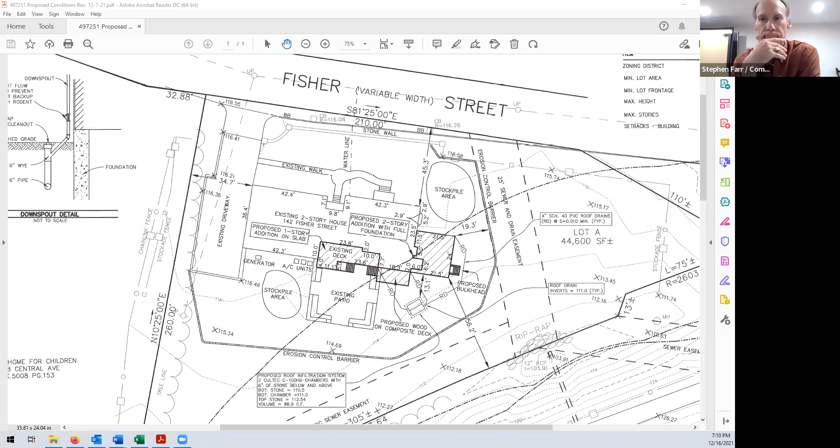Any commissioners have any comments? Bill, any comments? No comments. Peter? I'm good. Stephen? No comments. Allison? No comment. No comment from Clay either. No comment from me either, Janet. Sue, any comments? No comment.

Comments from anybody in the audience? There are no raised hands. Okay, so I think that we now have a DP file number, and you've added the subsurface infiltration to capture some additional roof runoff. So I think we have everything we need.

So can I have a motion to close the hearing for 142 Fisher Street, DP file number 234882? So moved. Second. All in favor: Bill, Aye. Allison, Aye. Stephen, Aye. Peter, Aye. Artie, Aye. Sue, Aye. Great.

Thank you very much. I think we have an order of conditions exhibit to look through, and we will issue that later this evening.

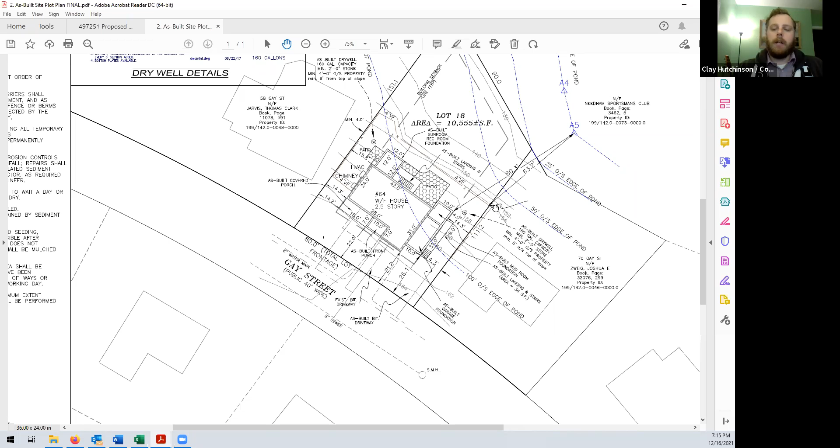However, one of the deviations was this patio was slightly larger than what was proposed. The original application had it coming squared off like this, and it was extended out a couple feet, all within existing lawn. They also installed the 2 dry well units that were proposed, one outside the buffer zone and one within. As discussed at the meeting last year, they replaced the fence in the existing same place, same style chain link fence, just an updated fence.

Concerns? Or what is your recommendation? Staff recommendation is that it is substantially within compliance. It looked good. We would recommend issuance of a full COC. There were no plantings required, so there isn't any mitigation period, so it would be a full COC.

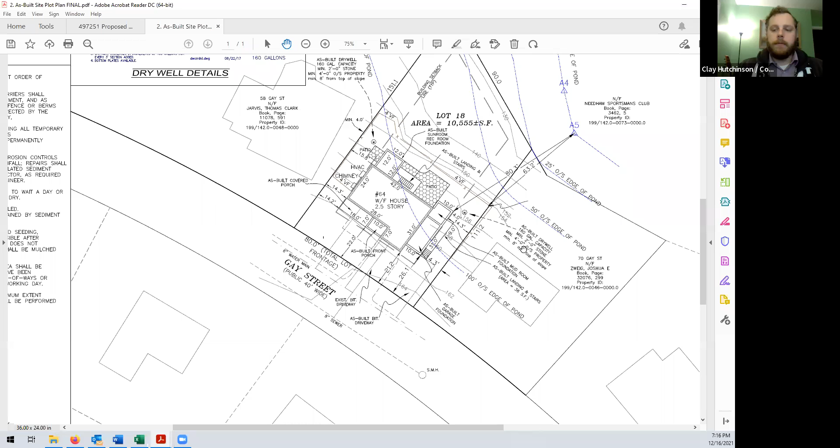Thanks. Pull that down now.

Okay. Any comments from the commission? Bill, no comments. Artie, no comments. Janet, you've disappeared. Stephen, no comment. Peter, no comment. Allison, no comment. Sue, no comment.

Does anybody in the audience have any comments on this project at 64 Gay Street? There is nobody in the audience.

So may I have a motion to issue the certificate of compliance for 64 Gay Street, DP file number 2348847. So moved. Second.

All in favor. Bill, aye. Aye. Aye. Allison, Sue, aye. Everybody said aye along the way, right? Yeah. Aye. Great. Aye. I'll say aye. Good, thank you very much.

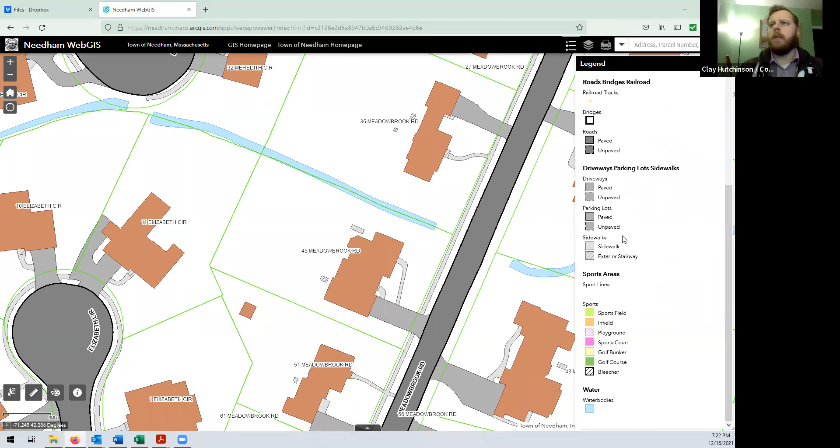Janet, I don't know if you still wanted to mention something about that before we close.

So this is 45 Meadowbrook here, and this is where Rosemary Brook runs. The pictures from the email are located here, here, and the ivy covered one is here. The other trees are right in here, along the same bank, similar. So essentially back to the back of the house next to the brook, those trees you want to take away are immediately alongside. So the front of the house is here, and all the trees in question are immediately alongside the house.

Oftentimes under administrative approval we require replanting 1-to-1 for hazard, 2-to-1, following the same tree removal guidelines. In this case, I think it would be difficult to replant 5 trees, one because there's still a canopy there, and two because of the proximity between the house and the brook. There's not a lot of room to dig down to put in a new tree, at least without removing those stumps, since this is a heavily vegetated corner, not lawn that they're trying to expand. So if they left the roots, it would be difficult.

We have in the past asked for replacements that contribute the same system, but not necessarily in the same location. Yeah, I don't think they should plant something close to that wall again, that doesn't sound like a productive place, unless they're shrubs. Good point.

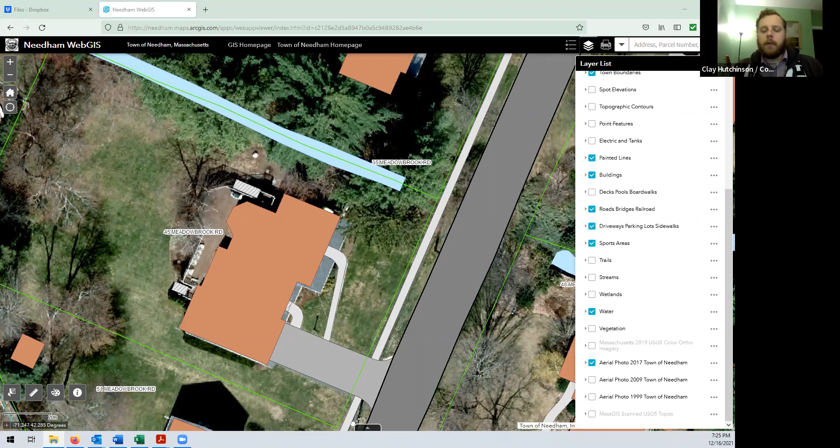Given the level of review we've had so far, I did meet the arborist out there over the summer originally to review these trees, and the house had not been acquired by his clients yet. It was sold, I believe, in September maybe. So now they're moving forward trying to address some of those trees, which was one of the concerns they had.

The discussion here is whether we should even be moving forward still under the admin approval, or whether they should be submitting like the RDA or an NOI, given that it's 5 trees. Oftentimes for these reviews, I think we're limited to 2 or 3, more of a minor project.

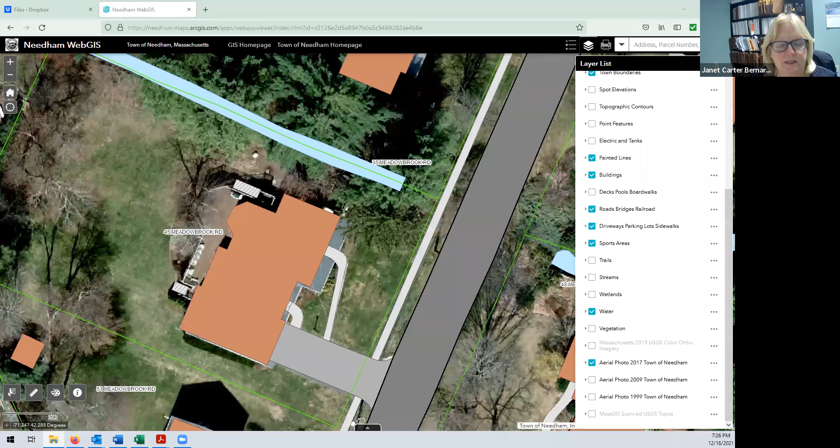Well, I guess if everybody's okay, you can take that down again. Personally, I see this as an administrative review because they're all right against the wall, but I'll hear from any commissioners that have a different opinion. Bill? No, I agree, administrative is fine. Artie?

Allison? I agree with the administrative approval, and it'd be great if they could plant some shrubs. I think more than a snag would be better than a snag. That's just my opinion. Shrubs are better than a snag. Thanks, that sounds good.

Stephen? I agree, administrative. Peter? Yeah, I'm okay with administrative, as long as they don't expand their lawn, I guess. And Clay and Deb, you don't think that's part of the plan here? They just want to get these trees down. Yeah, I don't believe that's at all part of the plan, unless they remove the stump and grind it down. They wouldn't really be able to, but as part of that administrative process, there is the contingency that replanting is required, and that's part of the template. So fantastic, no further questions.

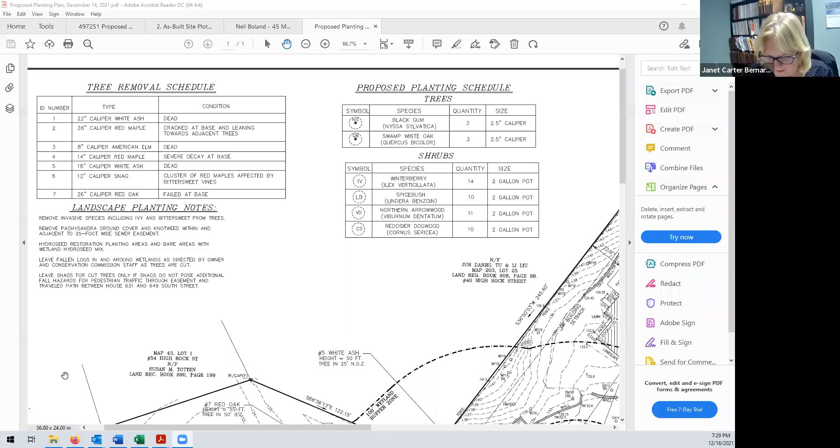So, do we want to just pull this up and then we can kind of talk about it, and we're gonna try not to talk about it for too long. We can manage that. Let's just... I'm not sure the best way.

I think there are 1, 2, 3, 4, 6 trees, and the intention was to add some robust plantings. Is Brian, is that what you've basically done? You want to tell us how you've changed this plan?

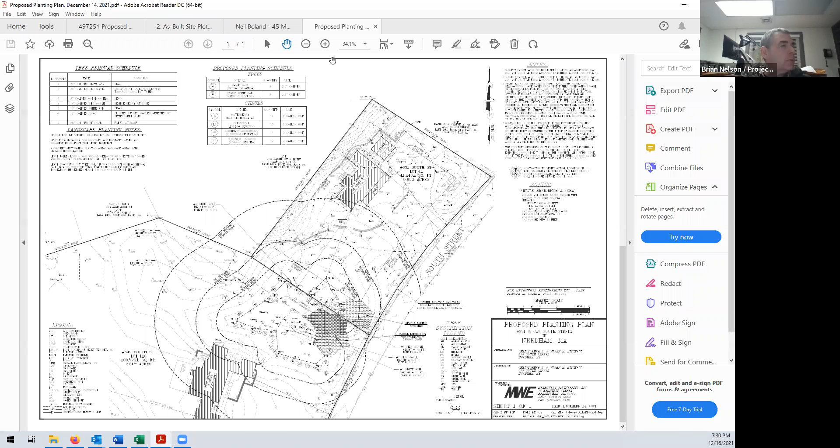Yes, if I can, this is Brian from Metro West Engineering, and thank you for hearing this tonight. I apologize for getting this in so late prior to the Thursday submittal. But what we did was we looked at basically planting some trees where we thought they would work and thrive, and then tried to go a little bit heavier on the shrubs. So we've got 6 proposed trees, 3 black gum and 3 swamp white oaks proposed.

And then we've got 45 shrubs kind of around the perimeter of the wetland area, and then basically kind of flanking the 2 sides of the easement. So we've got 14 winterberry, 10 spicebush, 11 viburnum, and 10 red osier dogwood. So we've got those spaced kind of around the perimeter of the wetland boundary and along the sides of the easement at approximate 6 to 8 foot intervals.

So we've shown those. They've got, you know, basically their names or abbreviations for the species names inside a circle with a dashed line. So you can see those plantings kind of really hovering around the wetland boundary. We've got two kind of hatched areas up near South Street, basically a couple larger areas, one including a part of the easement and just to the west or left of the easement, where we've got a pretty significant patch of Pachysandra. And then over on the north side or the east side of the easement, there was some knotweed that would be removed in that area as well.

We put some notes on the plan, basically to try and capture what we had talked about at previous hearings in terms of leaving fallen logs in and around this area, kind of at the discretion of wetland or conservation staff, and with some input from the owner. And then also a note to leave snags, as directed by the arborist, to see if the snag will be safe or make sure it won't pose a hazard. So that's really where we're at.

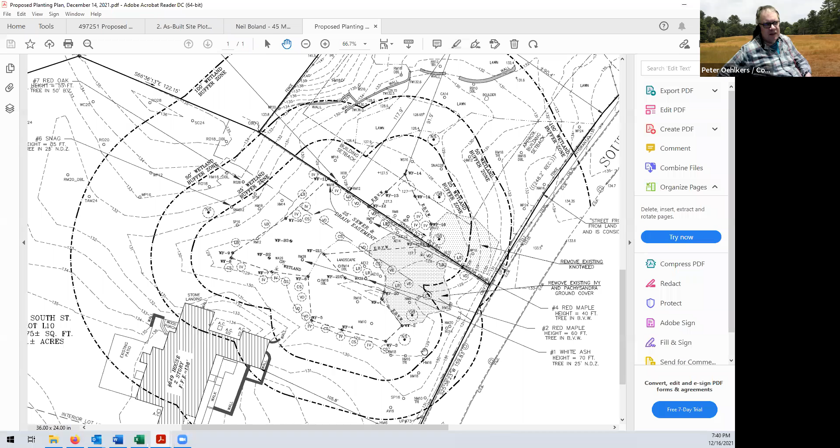Thanks. Anything else, Artie? No, that's it, Jim. Sue? Yeah, actually, just three quick things. I think DEP recommends the 8 to 12 foot for snags, but that's besides the point.

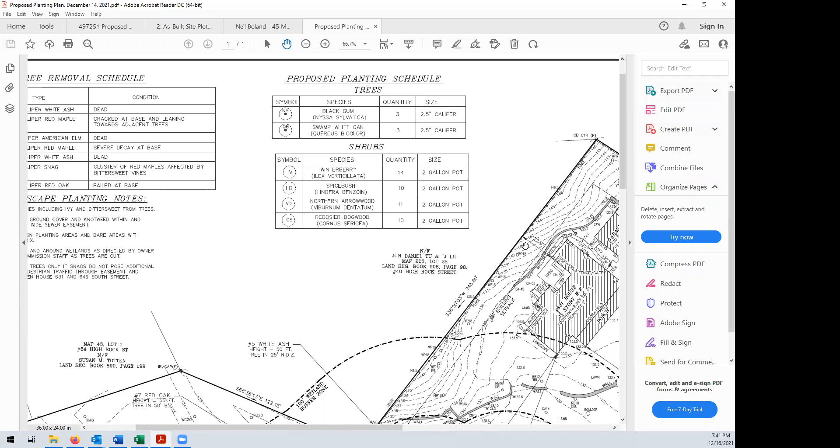What I was going to question was, it sounds like the replanting plan includes all shrubs, no trees. There are 6 trees, 3 swamp white oak and 3 black gum trees as well. Oh, okay. I do like Stephen's idea about the border with the shrubs, but I also had another question. I know there's probably going to be a lot of lumber and pieces of trunk. There's probably only a limit of how much to really leave in a wetland area. It could interrupt the flooding function, the sponge function the wetland has with flooding, if there's so much lumber left along the border, particularly. That was my question.

Deb or Clay will be out there, and you're right, they don't want to leave so much that it prevents containment or restricts the flooding of the area. Yeah, we're just looking to create some habitat, so we'll be involved when we get to that point.

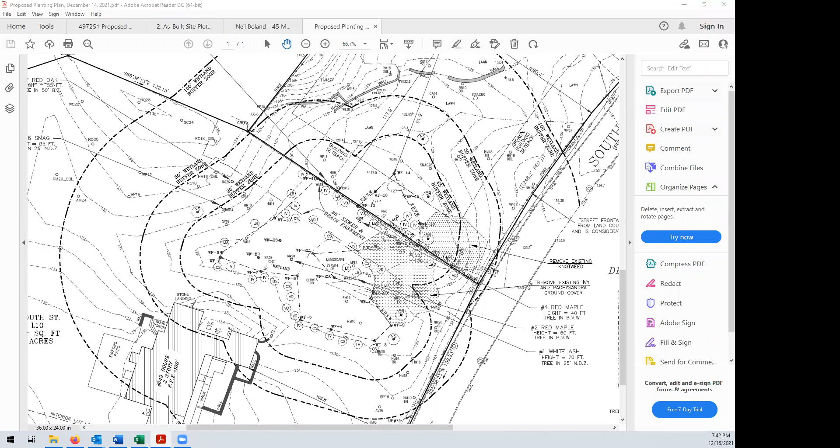Okay, anything else? Any other comments, questions? We can take this plan down now. Thank you, Clay.